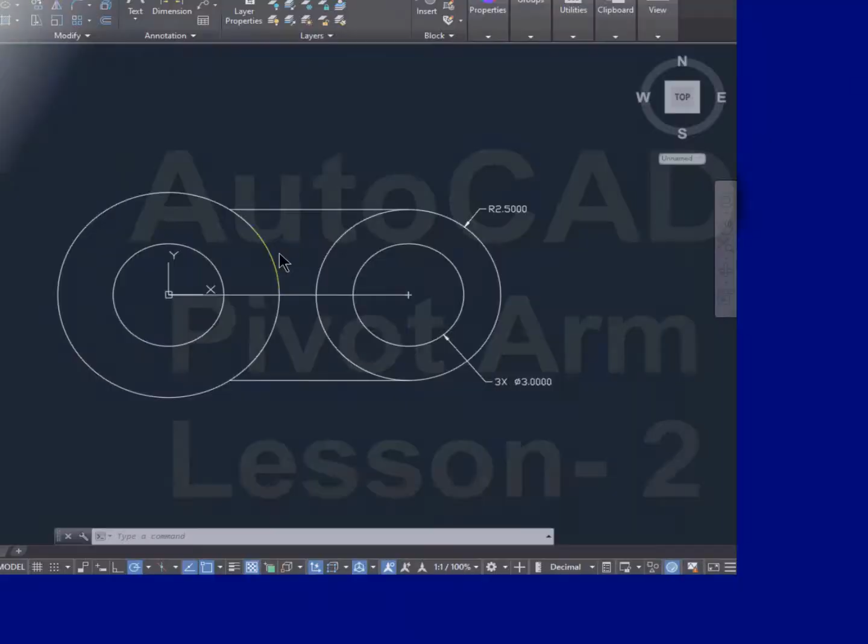For the second lesson, I'm going to make the pivot arm and start adding dimensions to it. So we have the initial pivot arm here. Notice there's a 45 degree angle shown, the same as the part on the right hand side.

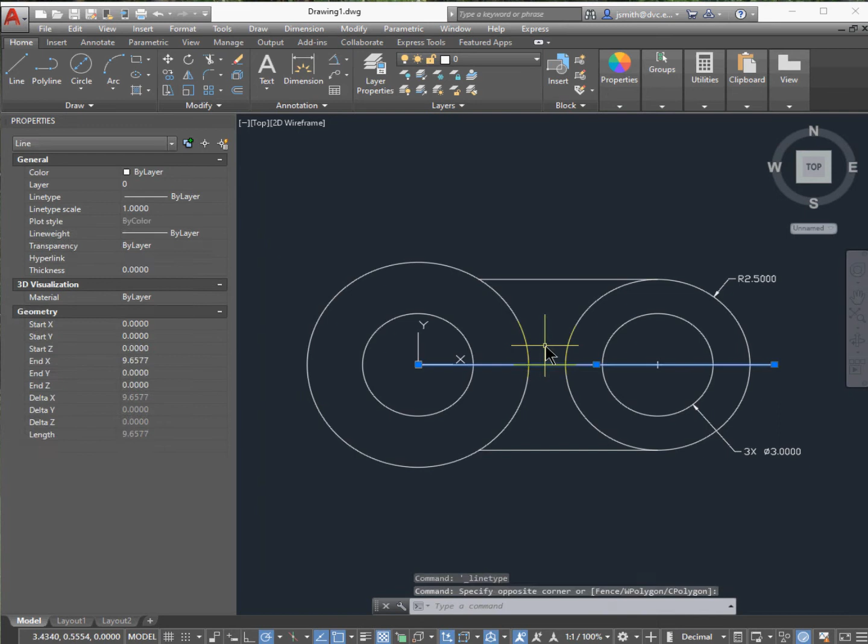I know that, so I'm going to extend this line out, which is actually going to be a center line. If I go to properties, if I've been working on my own computer, I'll probably see the line type there. But if you don't have it, go into the Format menu, select line type, select Load, select Center, and press OK. Then select the line, go to line type in the properties menu, and set that to center.

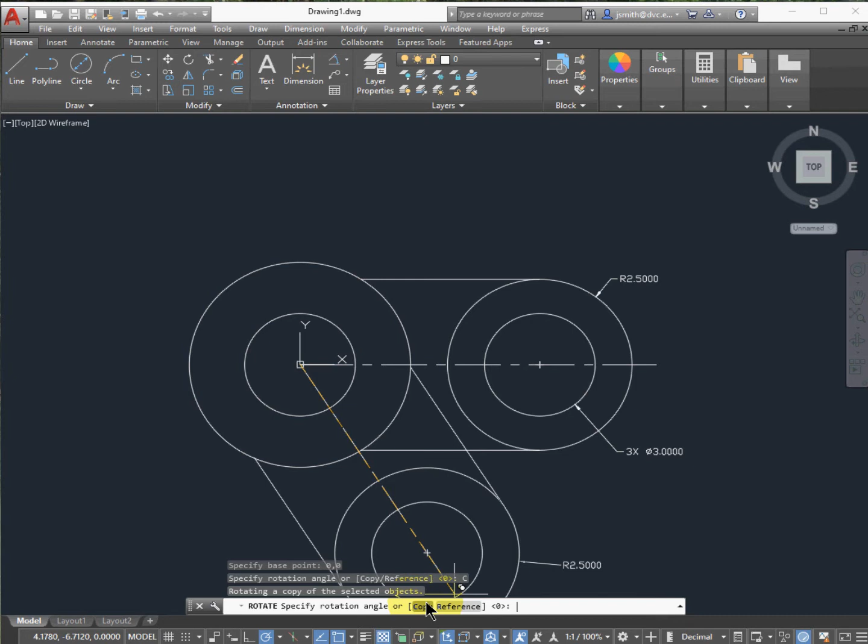Okay, looks good so far. Now I'm going to rotate this. Type in rotate, and select everything to the right of that circle - we can delete what we don't need, so everything to the right of the two concentric circles. Push enter. The base point is going to be 0,0, which is what I started with. Now it goes positive, so I'm going to type in 180 plus 45, so that's 225. Go ahead and type in 225 and press enter.

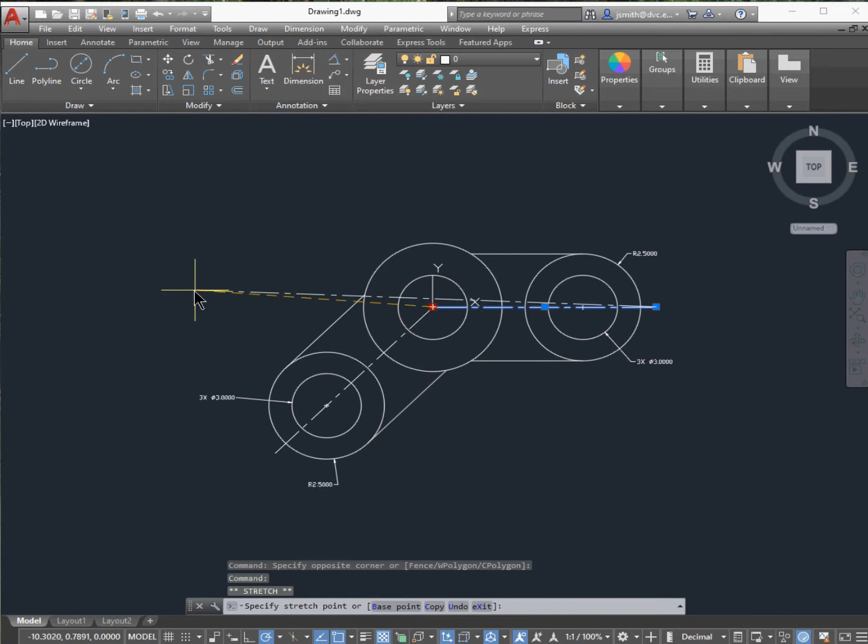Now make sure you hit copy. If you didn't hit copy there, that wouldn't work - if you need to go back and do that again, make sure you hit copy. Now I'm just going to extend this center line out here.

I'm looking at my drawing on my PDF file, trying to copy that, getting rid of some items I don't need here. Now I can go ahead and dimension this angle, or add the annotation that's 45 degrees. That looks good.

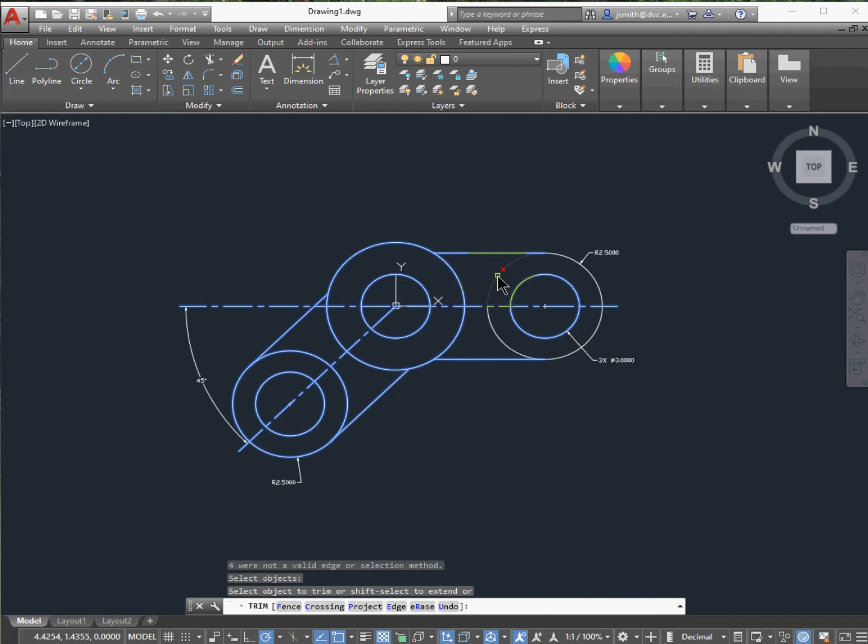Okay, so far so good here. Let's go ahead and trim what we don't need - I could have done this earlier, but it's just as easy to do now. Go ahead and trim this circle here because they're touching, it's going to work fine. Then hit escape.

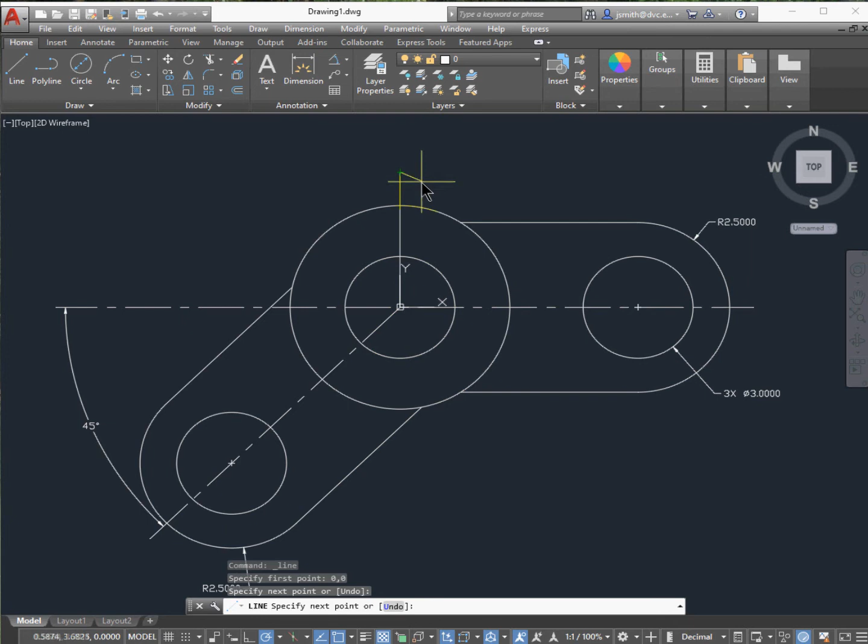Alright, so I want to start dimensioning this properly. I have to make some of these lines - if I look at that dimension, I have a dimension line here, but it's actually a center line. So I'm going to type in 0,0, then go up and eyeball this a little over, hit escape, and bring this down so I know it's at my 0,0. Then I'll make another line - I could type it in at X at 6.5 and go up, but I'm just eyeballing it here. You'll notice I'm snapping it, dragging it, not along that green line, just to make them visually align.

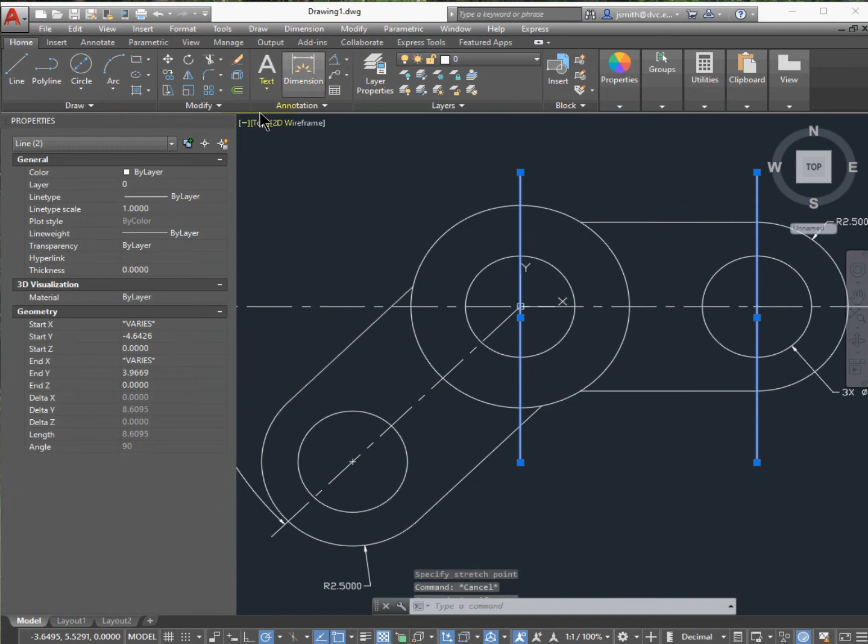And then I do need these to be center lines, so I'll go to properties, and because I've already loaded it, I should just select center. There's another one I need to do at that 225, or 45 degree angle. So I'll make another line there.

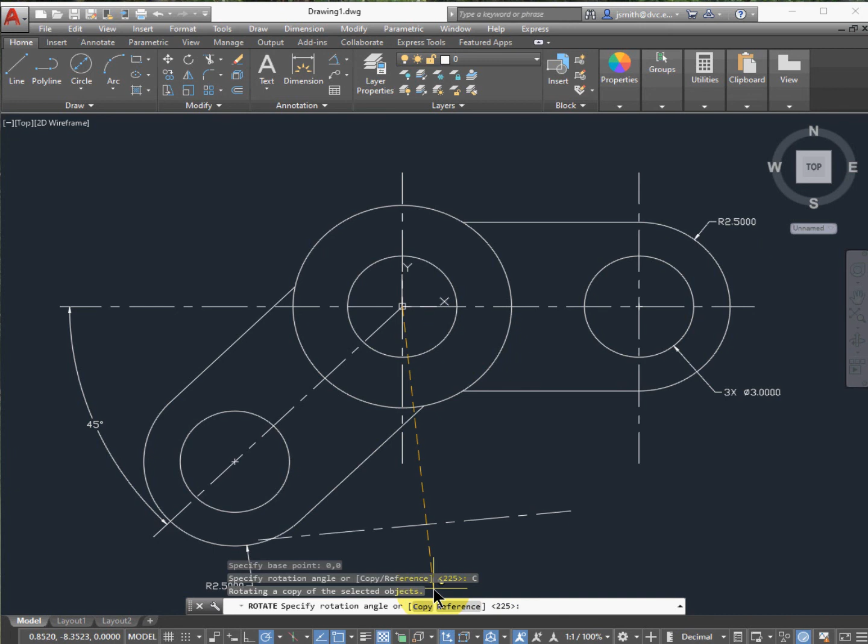You know what I'm going to do here - I'm actually just going to rotate this and practice. Select this line, push enter. The base point is again going to be 0,0. Push enter. Now make sure you hit copy - if you don't, it'll go away. And this is at 225, I could just push enter, and there it is. So it's that rotation, and then you hit copy.

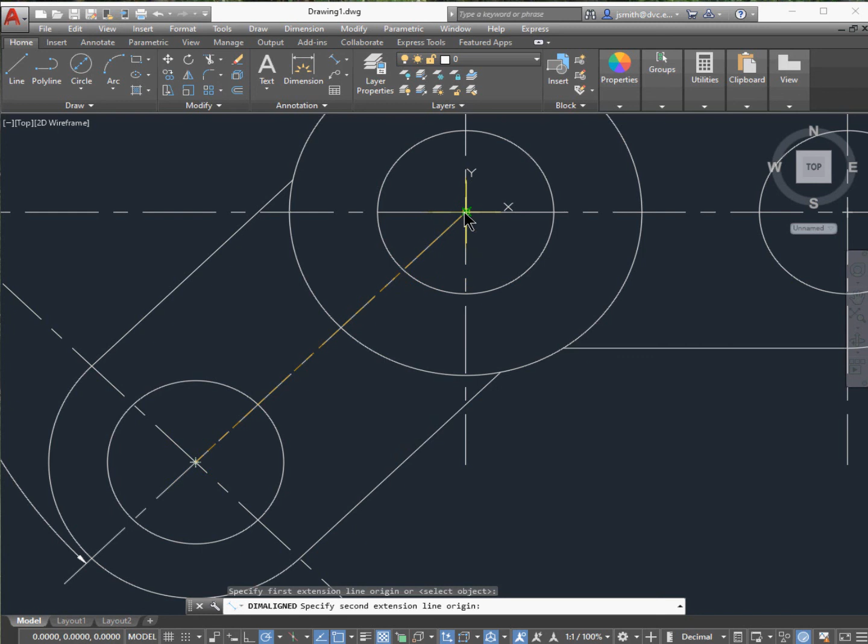I can clean this up a little bit, but we'll go ahead and put these dimensions on there, and I'm copying the textbook as closely as I can. We'll need to do one more here - I'm going to select the center of that circle from the 45 degree, then at 0,0, and then move that out.

Alright, so this looks good. You've completed the second lesson of the pivot arm.